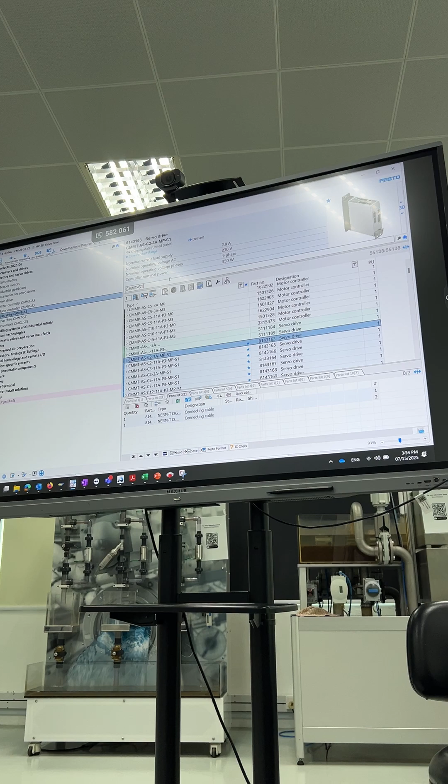Then we also have a stepper drive, which is a CMMT ST. For ST, we don't have a lot of models, only one model for stepper, and this the spec you can look at it yourself. Basically, the stepper model has an 8 amp current, and it can support nominal input voltage of 24 to 48 volt DC.

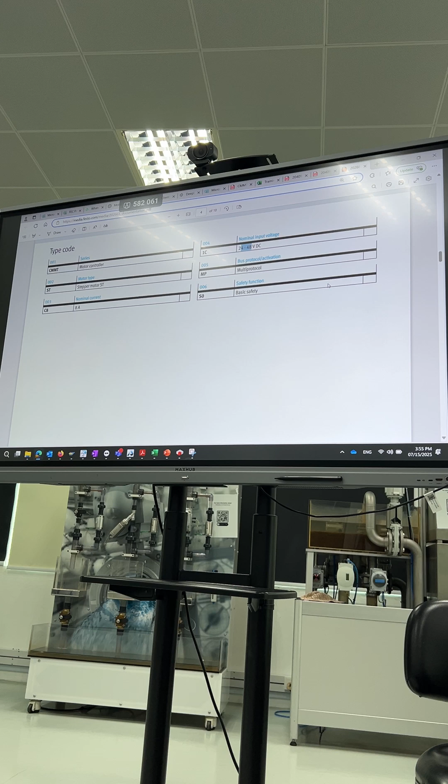So as you see here, this is a big servo motor, and this is a stepper motor. Their power supply are different. When we say 24 volt to 48 volt, it means the stepper motor will need a 24 volt electronic supply to power up the driver, then it will need load supply. Load supply is to supply to the motor, and that can be 24 volt or 48 volt.

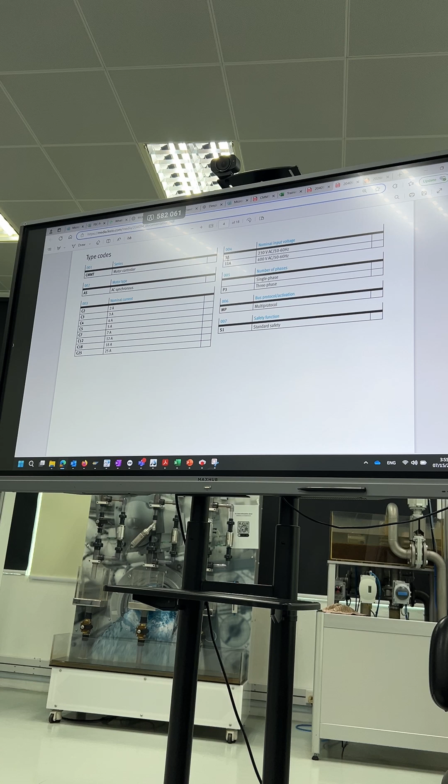Same for CMMT-S. For servo drive, you will have a lot more models. As you can see, there is different kinds of current, C2 up to C25 - this is the nominal current that the servo drive can supply. And then there are different kinds of input voltage. Same like stepper, it will still need 24 volt to power up the electronics in the driver, but this nominal input mentioned here is for the motor supply, or we call the load supply.

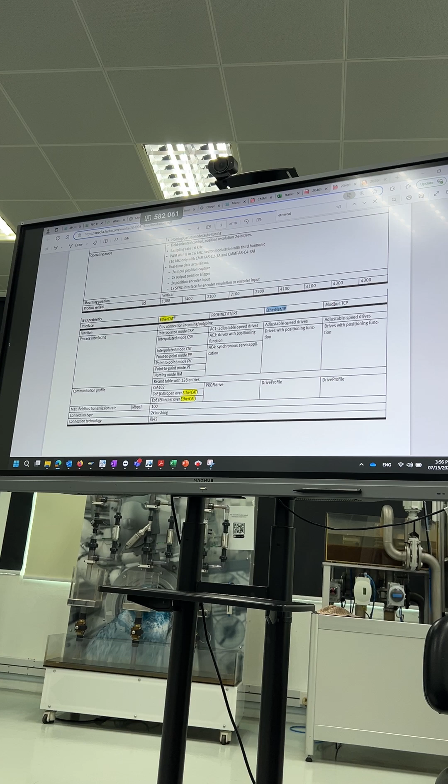So 3A is for 230 volt, and 11A is 400 volt. 3A is single voltage and single phase, and 11A is three phase. All our drives are multi-protocol, meaning it supports interfaces such as EtherCAT, Profinet, Ethernet IP, or Modbus TCP. This interface can be configured through the DIP switch, or it can be configured in our FAS.

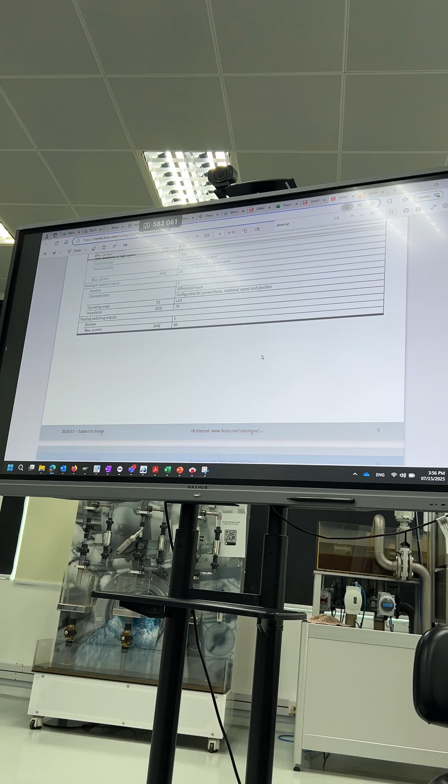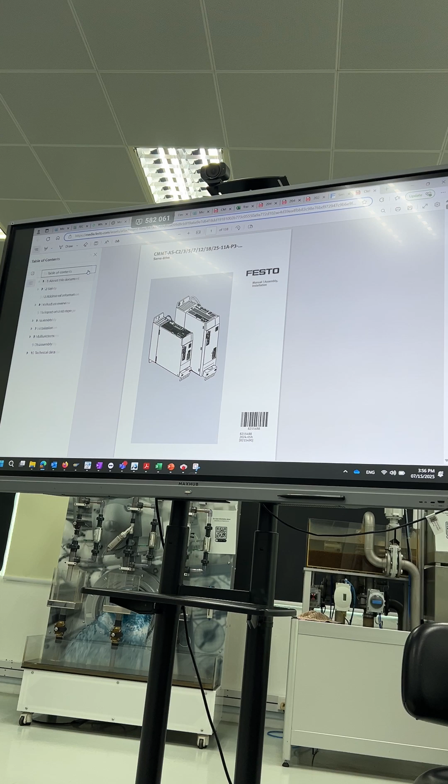The specifications I won't go through, but maybe I will share something on the installation. Okay, so we start from the installation - this part is not important. Maybe I should see from here.

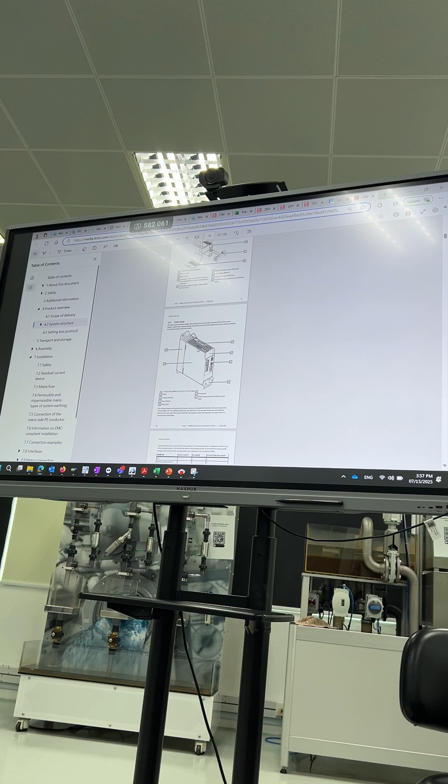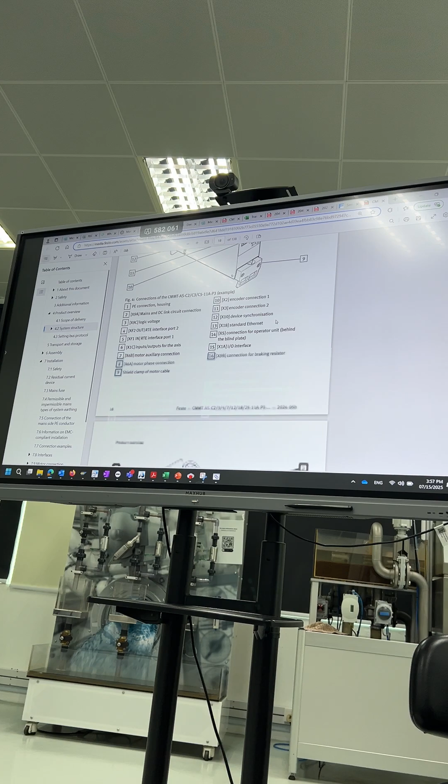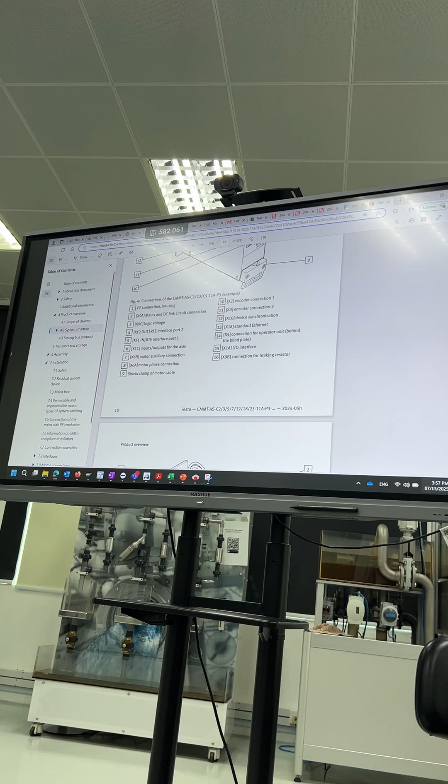So as you see, this is our CMMT-S. You can see there is a lot of ports, a lot of connections that you need to do. Let's just look at the actual one since we have connected it. Maybe you guys can come here. So we have a lot of ports here.

First one is the parameterization port, which is X18. X18 is the port that if you want to control or parameterize the CMMT, you connect to X18. Over here X10 is the port where we can do hardware synchronization, or it can also act as an encoder input. So X10, X3, and X2 can all be used for different kinds of encoders.

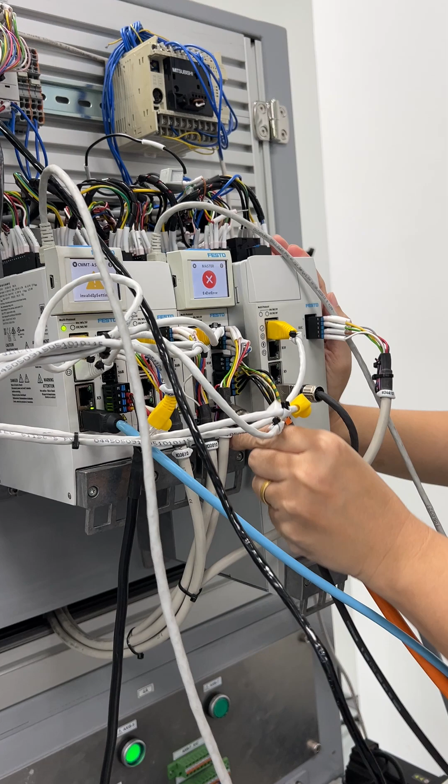For example, normally for the motor encoder, we will connect to X2. Then X3 is if you have any additional third-party encoder, or maybe a linear encoder on your axis, then you can connect to X3. It could also be an encoder from somewhere else, you can connect with X3. X10 is normally used for hardware synchronization.

So for our CMMT, we could do hardware synchronization between both our CMMT units, but we won't be touching it today. Today is more to the basics of the CMMT.

Okay, then we have connections here. Let me turn off the power first. Up here, this port is - sorry, there's also a field bus port. X19 field bus port is for the field bus connection. So your EtherCAT, your Profinet or whatever, you need to connect to the field bus port, in order for the field bus to communicate.

Then you have this connection here, X9A. X9A is your power supply - both the sensor supply (PS), meaning you need to provide 24 volt to the drive, as well as the load supply, single phase or three phase. So if you see three phase here, it will be connecting to three phase, and single phase we are connecting single phase, but there's also a 24 volt DC to power up the sensors. For three phase drive, it's separated.

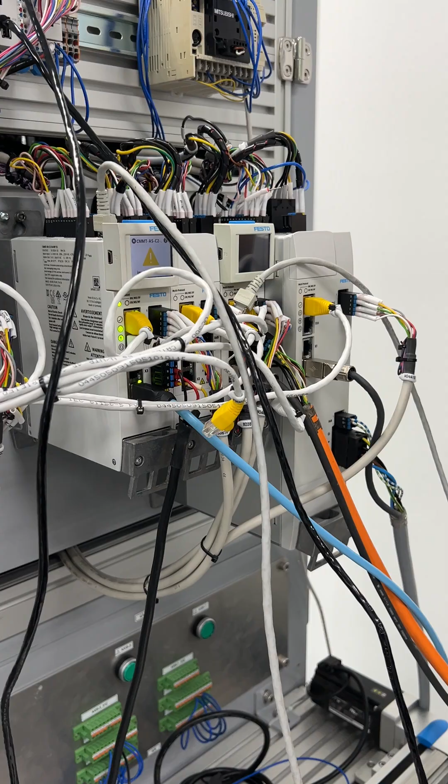Then you have additional, before that, the supply for the stepper. This could sometimes cause some confusion here, because you see there's a 48 and 24 volt.

Okay, what it actually means is that 24 volt is a sensor supply and 48 volt is a load supply. So in this case, even if your customer is using 24 volt and you don't have 48 volt, it's okay, but you still need to connect the 24 volt to the 48 volt label here, because this is a load supply. If you don't connect it, you will get a load voltage under voltage, or some error like this.

Then we have some digital I/O for stepper, as you can see here, X1A. This one we will go into details later on, I'll show it from the side. Same for the CMMT AS, we also have X1A, but there is a lot more compared to the stepper.

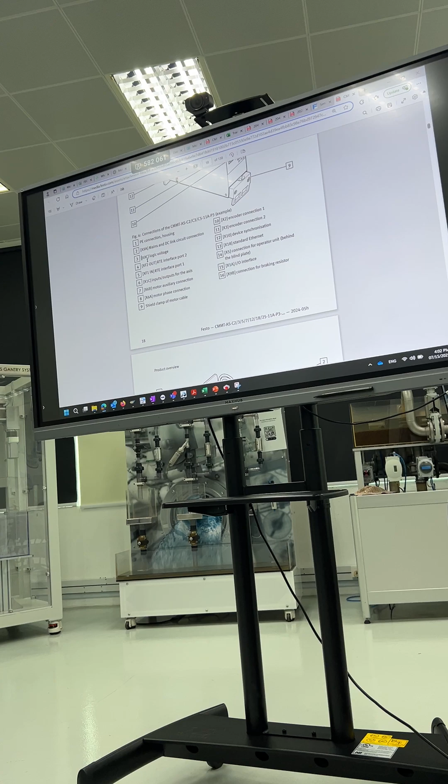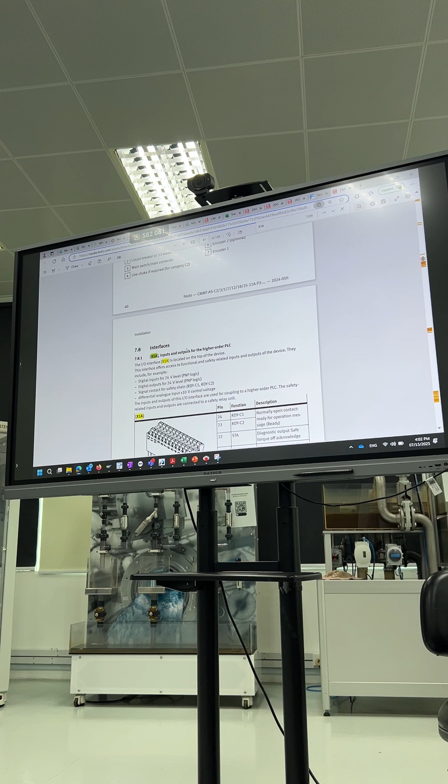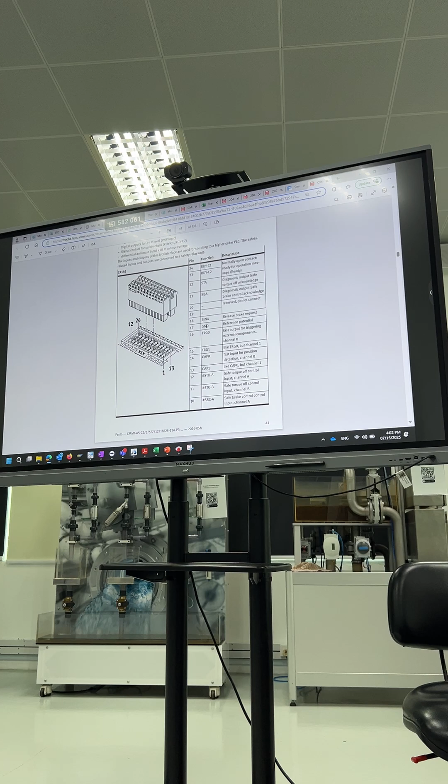So we'll start with, okay. In fact, there is a lot of different kinds of I/O here, but let me just go through some important ones that we must use. This one doesn't matter much, so for example, STO.

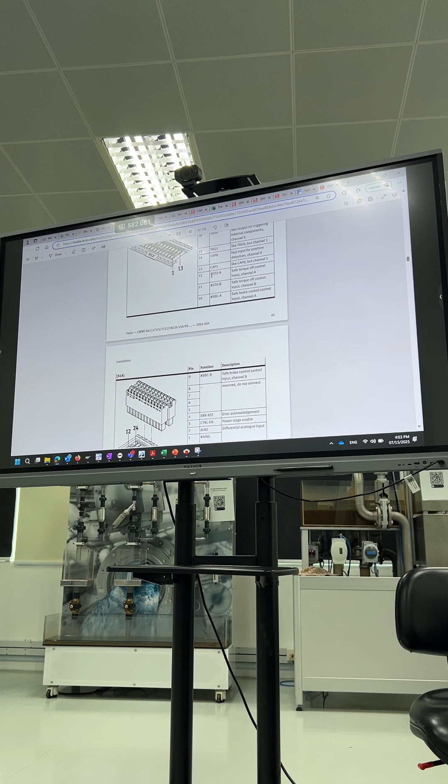Up here, STO and SBC. So STO and SBC are safety functions. We won't touch on this now, because later on, at the end of your trip, you will have advanced safety training, so we can discuss further. They will be able to train us about that later on.

This safety function means you must provide 24 volt to these 4 ports: STO-A, STO-B, SBC-A, and SBC-B, in order for you to use the CMMT properly. Because if you don't have a 24 volt supply to them, you will get a safety function requested.

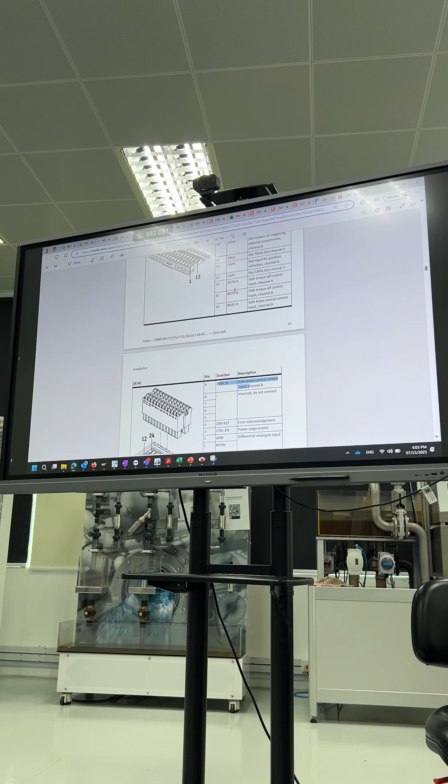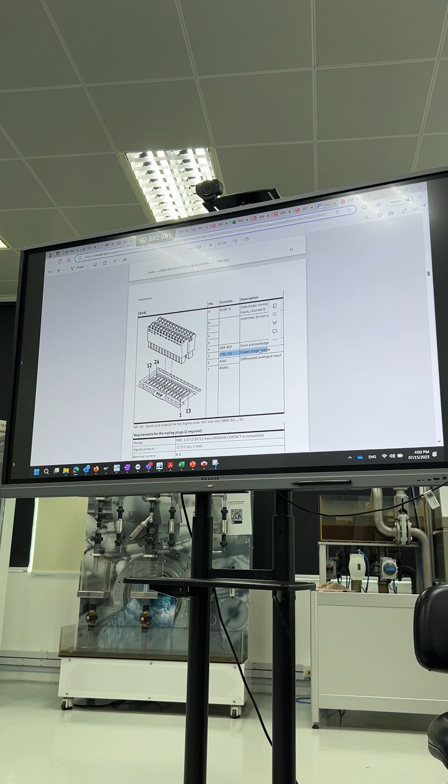Okay, then there is also a control enable power stage. This one will depend on the configuration of our FAS. When you have control enable, you need to provide 24 volt to control enable for you to enable the motor power stage so that the motor has torque. Richard, if you're not clear what I'm saying, just ask, okay?

Yeah, because I'm not sure how familiar you are with the servo drive.

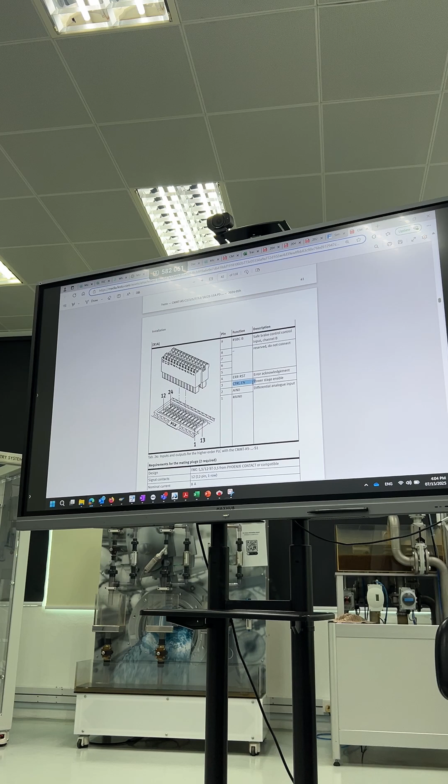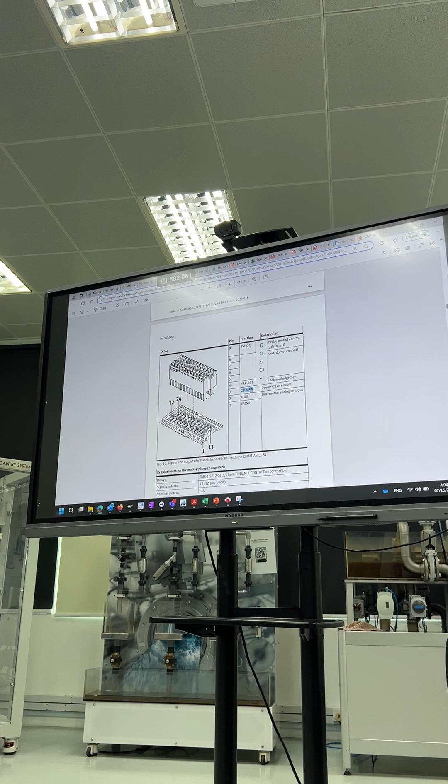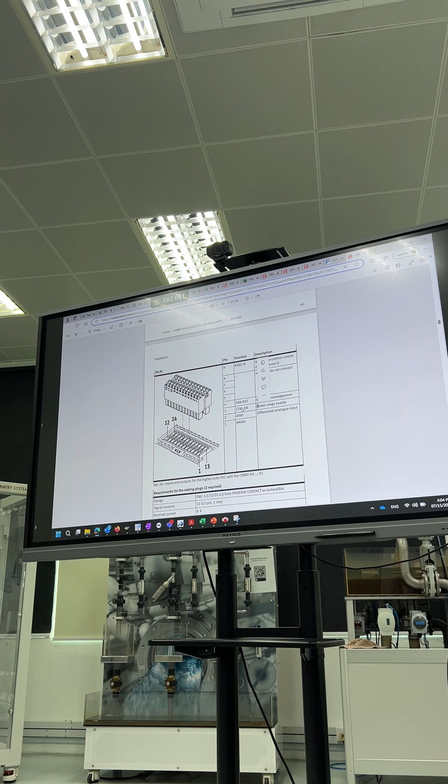So for example, in your customer's case right now, if they have configured it so they need control enable and they did not supply control enable, most likely they will face the error just now, because the error showing is that the task is ignored since control enable is not there. If they have configured it and try to enable it, this could be the reason: they do not have a 24-volt supply to the control enable. But if they switch the configuration to Fieldbus, then no issue. Because we do not know what configuration they are using, and we do not know if they have connected this or not.

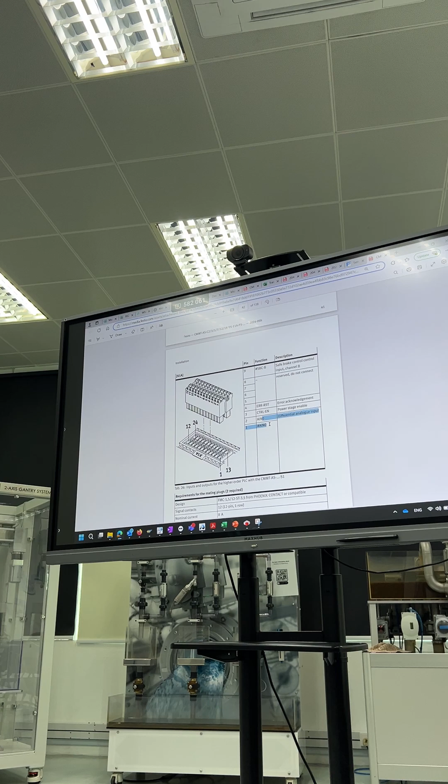Then also the other input, like the analog input here. If you want to use analog to control, you need to connect the analog input here. Then you can also do error acknowledge from digital input, there is an error acknowledge here.

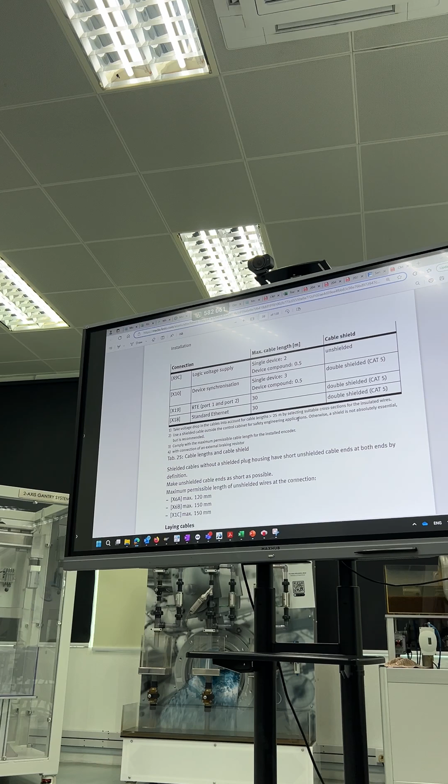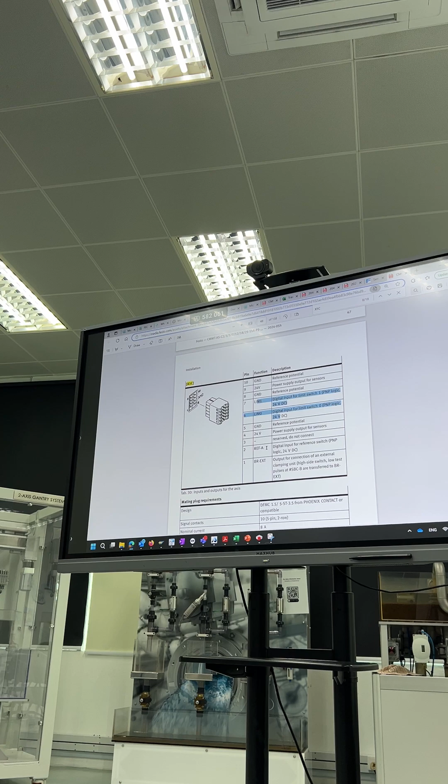Then beside X1A, I think there is also X1C. So X1C is normally used for the limit sensors and reference switch. Because for our drive, we will show here, let's go to the knowledge board.

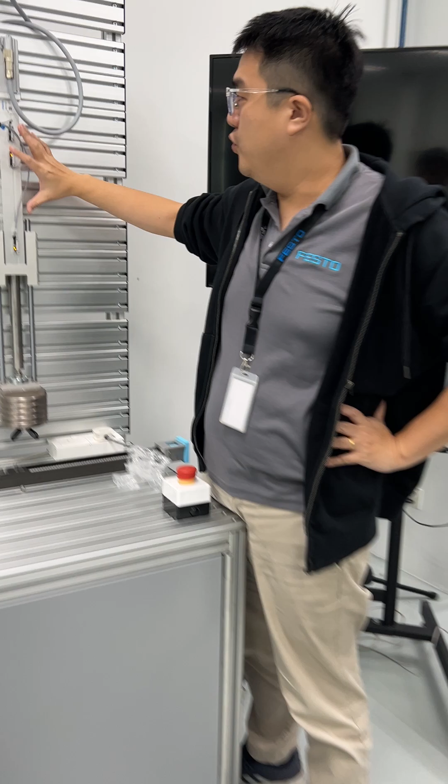Ideal situation for actuator, right? It's like this, we will have two — these two are called the limit sensors. The limit sensor is there to protect it so that your actuator will not move beyond this position. When this limit sensor is on, your drive will error and you cannot enable it, so when you want to enable it, you'll probably get some error. Same with this — normally we have one negative sensor and one positive, though it could be the other way, but bear in mind we have two limit sensors.

And then we have one reference switch. The reference switch is used for homing, so that it knows where the zero position is. The reference switch is sometimes not necessary because even without the reference switch, you can actually use the limit sensors to do homing. There's actually a lot of homing modes that our CMMT can support. Maybe tomorrow I'll share more on this, or maybe later I can show it, let's see if we have enough time.